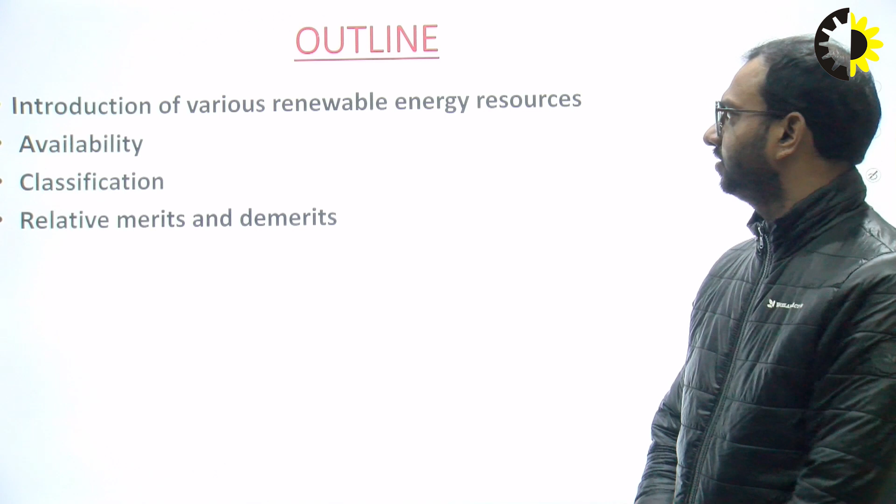Today, I will discuss one of the complex topics of the subject renewable energy resources. So today in this lecture, I will discuss about various renewable energy resources. These are the content of my today's lecture: introduction of various renewable energy resources, its availability, classification, and its relative merits and demerits.

So what is energy resources? Basically, energy resources are classified into two categories: one is conventional energy resources and another one is non-conventional energy resources. Conventional energy resources are also known as non-renewable energy resources, whereas non-conventional energy resources are also known as renewable energy resources.

First of all, I will discuss what is conventional, non-renewable energy resources. Basically, these are accumulated in nature over a long span of time and cannot be quickly replenished when exhausted. These are known as conventional energy resources. If we are talking about its examples, coal, petroleum, natural gas, and nuclear fuels like uranium and thorium come under the category of conventional energy resources.

Then what is renewable or non-conventional energy resources? Basically, these sources of energy can be used again and again, and this can be generated continuously in nature. Examples of renewable energy resources are solar energy, solar thermal power plant, wind energy, biomass energy, ocean energy, thermal energy, geothermal energy. These are the examples of non-conventional energy resources.

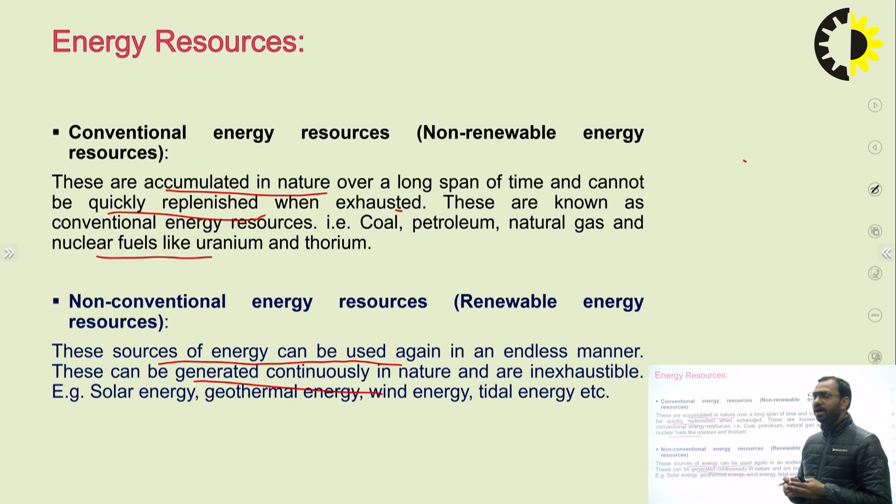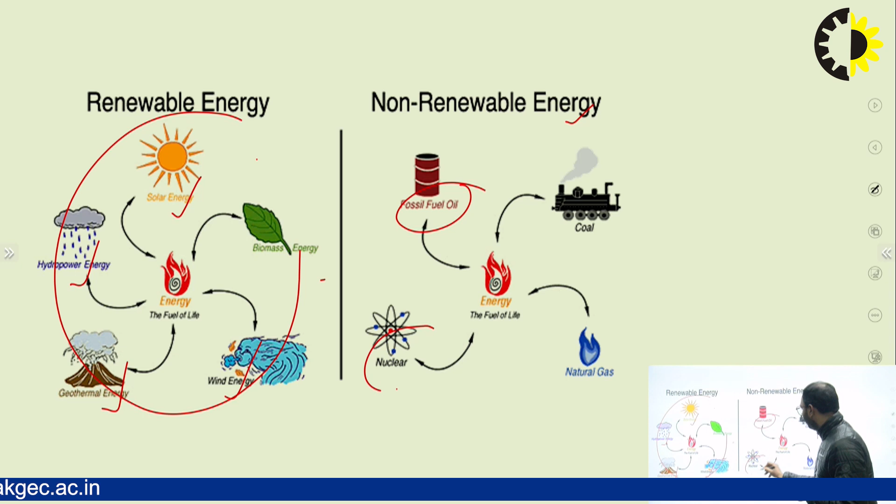So these are the renewable energy resources: solar energy, hydropower energy, geothermal energy, biomass energy, wind energy. All these are examples of renewable energy resources. Then, if you are talking about non-renewable energy resources, fossil fuel, nuclear fuel, natural gas, and coal are examples of non-renewable, conventional energy resources.

Now I will discuss one by one in detail what is wind energy resources, what is solar energy, what is ocean energy. So what is wind energy? Basically, wind power is usually generated by wind turbines situated either onshore or offshore.

If we're talking about wind energy in India, wind energy is utilized by means of windmill. Many projects on the windmill system for water pumping and production of small amounts of electrical power have been taken up in our country. Following are some of the developments in India.

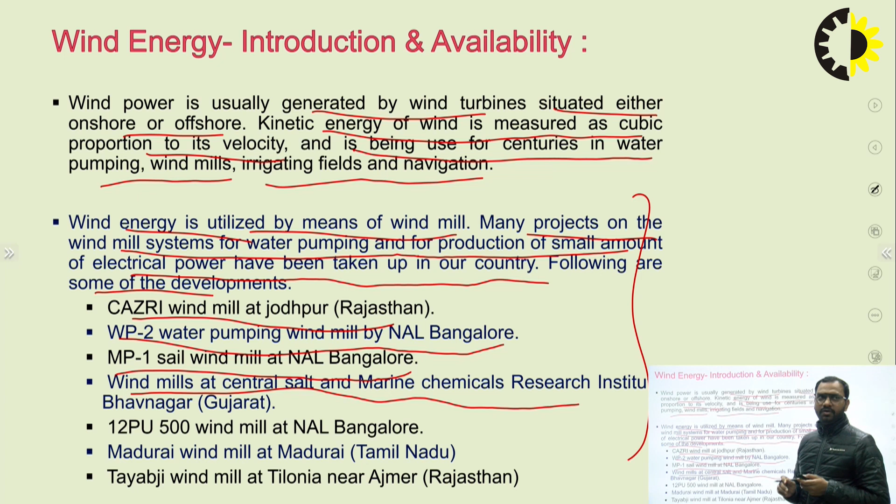Number one is CAZRI windmill at Jodhpur, Rajasthan. WP2 water pumping windmill by NAL Bangalore. MP1 Sail windmill at NAL Bangalore, windmills at Central Salt and Marine Chemical Research Institute, Bhavnagar, 12 PU 500 windmill at NAL Bangalore, and Madurai windmill at Madurai, Tamil Nadu, and Tayabji windmill at Tilonia near Ajmer, Rajasthan. These are some developments regarding wind energy in India.

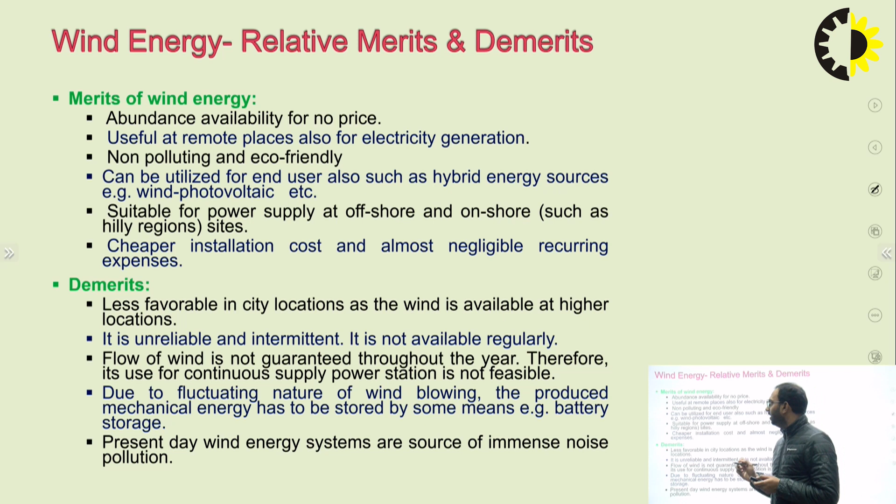Now, what are the merits and demerits of wind energy? If you are talking about its merits: abundance availability for no price, useful at remote places also for electricity generation, non-polluting and eco-friendly, can be utilized for end user also such as hybrid energy sources, example wind photovoltaic etc. Suitable for power supply at offshore and onshore, and cheaper installation cost with almost negligible recurring expenses. These are the merits of wind energy.

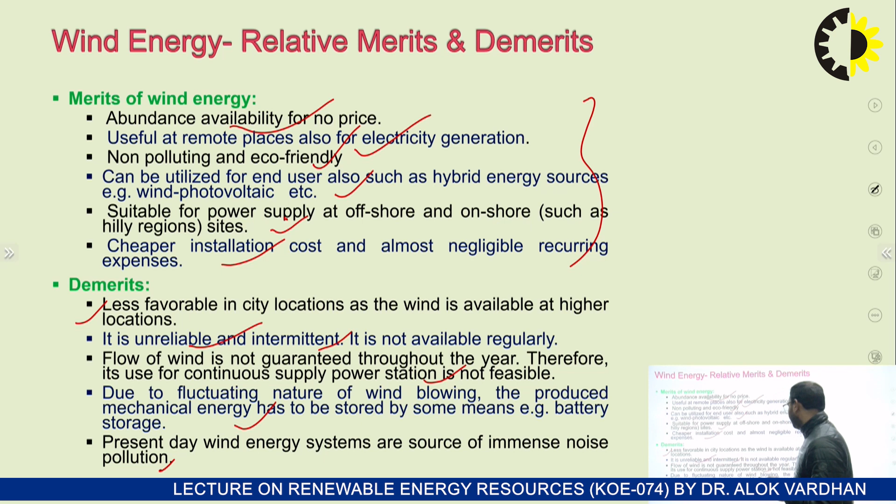Then what are the demerits? The first demerit is less favorable in city location, as the wind is available at higher locations. Then it's unreliable and intermittent, not available regularly. Flow of wind is not guaranteed through the year, therefore its use for continuous power supply stations is not feasible. Then, due to the fluctuating nature of wind blowing, the produced mechanical energy has to be stored by some means, example battery storage. And the last disadvantage is present day wind energy systems are a source of immense noise pollution.

Then the second renewable energy resource is solar energy. What is solar energy? Solar energy means it is clean and abundantly available renewable energy. The total radiant energy of the sun is vast, out of which only a small fraction gets incident on the outside of the earth's atmosphere.

30% of it is directly reflected back to the outer space in short wave radiation. 47% is directly converted to heat that is lost to outer space in long wave radiation, and the major portion of the rest, 23%, causes evaporation, precipitation, and circulation of water in the hydrologic cycle of the earth. So the sun radiates its energy in all directions of the universe.

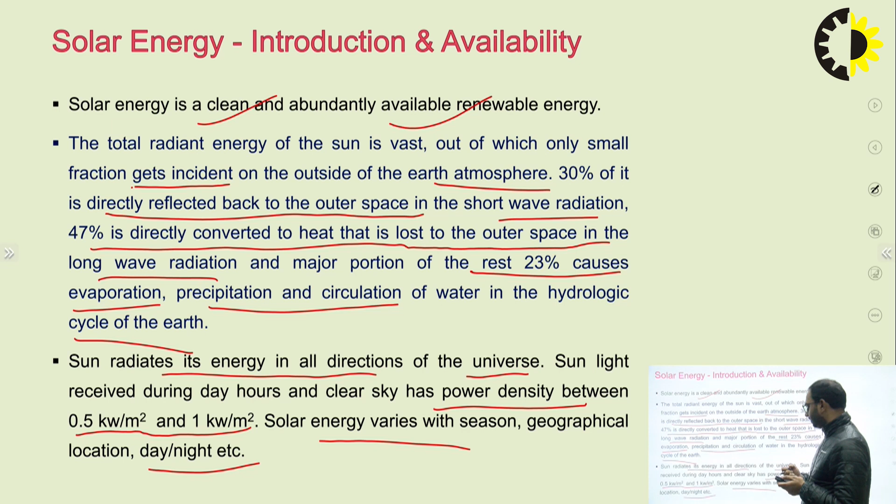What are the merits and demerits of solar energy? The first merit is noiseless operation, occupies less space on floor as there is no need of storage vessels, cheaper initial cost, and no need of containers to store fuels. In most equipment, maintenance cost is negligible and does not require any serious attention during working. For example, food will be cooked simply by putting a solar cooker in sunlight. So these are some advantages of solar energy.

Then what are the disadvantages or demerits? The first demerit is solar equipment fails to work at night, on a cloudy day, or in rainy season. Larger space is required for collection of solar energy at a useful rate, and it also depends upon time, season, and condition of the environment.

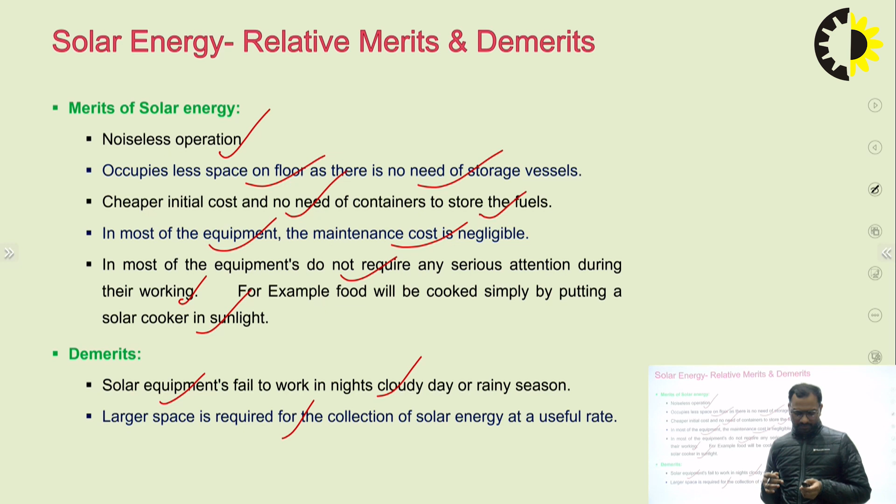The next renewable energy is tidal energy. Tidal power exploits the movement of water caused by tidal currents, the rise and fall in sea level due to the tides. Although not widely used, it has potential for future electricity generation and is more predictable than wind and solar power. The technology required to harness tidal energy is well established, however it remains expensive and there are relatively few applications, around 40 worldwide.

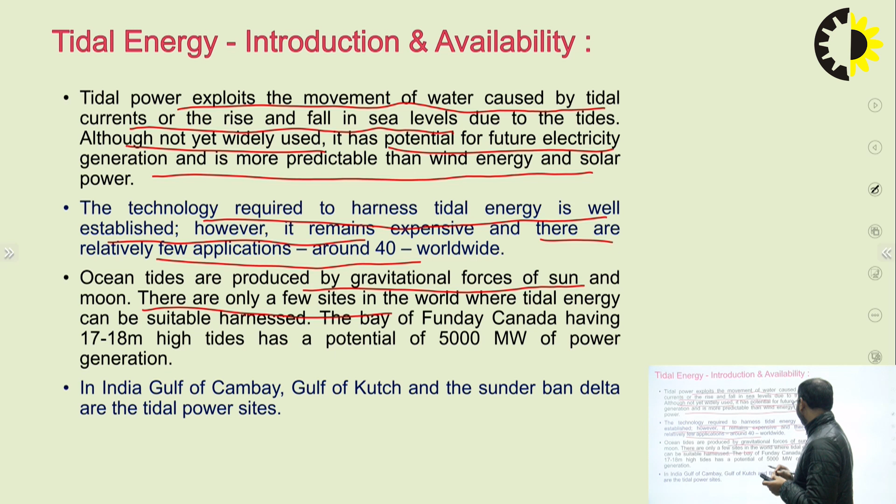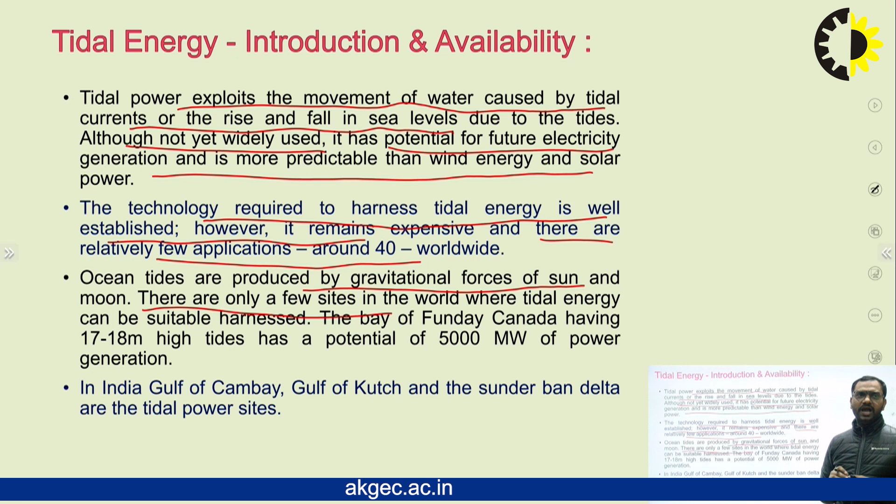Ocean tides are produced by the gravitational force of the sun and moon. There are only a few sites in the world where tidal energy can be suitably harnessed. The Bay of Fundy, Canada, having 17 to 18 meter high tides, has a potential of 5000 megawatts of power generation. In India, Gulf of Cambay, Gulf of Kutch, and the Sundarban Delta are the tidal power sites. This is the pictorial representation of a tidal power plant.

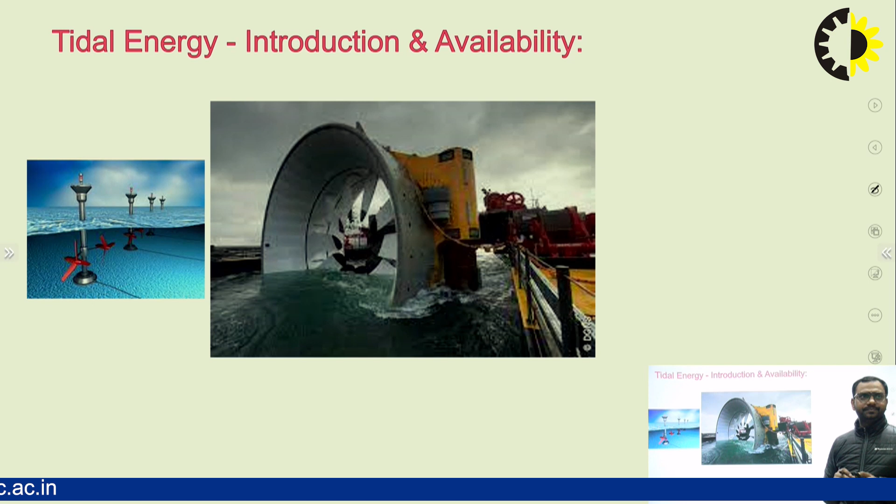What are the merits and demerits of tidal energy? The first merit is very less area is required because they are on bays. It is free from pollution as it does not use any fuel. It is much superior to hydropower plants as it does not totally depend on rain, which always fluctuates year to year. It does not produce any unhealthy waste like gases, ash, refuse, etc. Tidal power has a unique capacity to meet peak power demand effectively when it works in combination with thermal and hydro systems.

Talking about demerits, a tidal power plant can be developed only if natural sites are available. As these sites are on the bay, which will be always far away from the load center, the power generated involves more transmission cost. Supply of power depends upon the timing of tides, hence not continuous. To solve this problem, a double basin with pump storage must be made. The capital cost of the plant is also high, and navigation is obstructed.

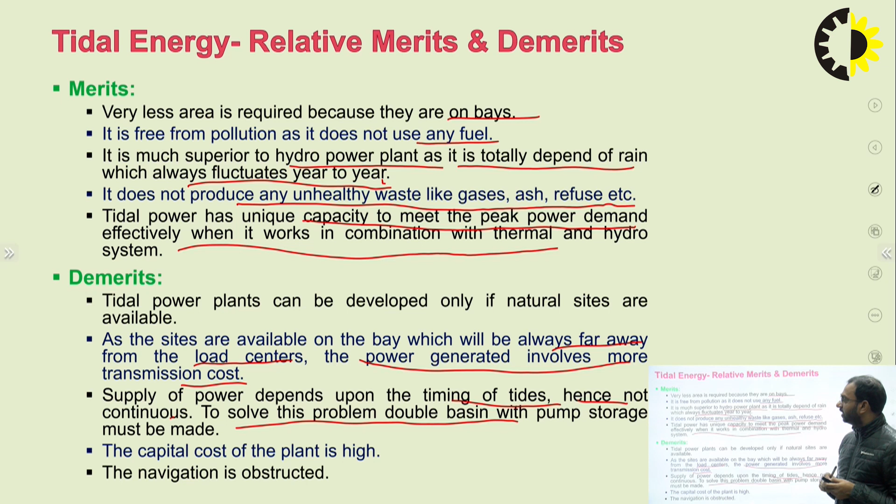What is MHD energy? MHD energy is also a type of renewable energy source. MHD generation, also known as magneto-hydrodynamic power generation, is a direct energy conversion system which converts heat energy directly into electrical energy without any intermediate mechanical energy conversion. This is the pictorial representation of an MHD power plant.

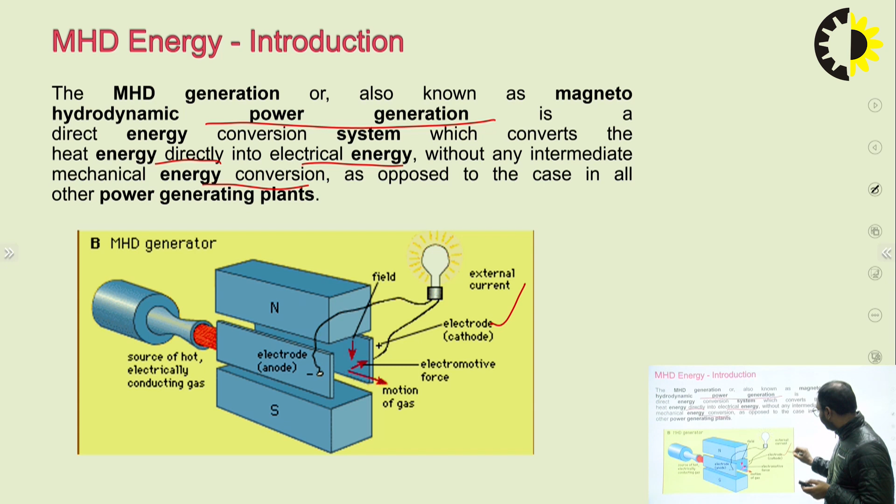What are the merits and demerits of an MHD power plant? The first merit is it is more reliable because there are no moving parts. The efficiency of an MHD system can be about 50%, compared to less than 40% for the most efficient steam plant. As soon as it is started, it can reach full power level. Power produced is free of pollution, has less overall operating cost, and the capital cost of an MHD plant is comparable to that of a conventional steam plant.

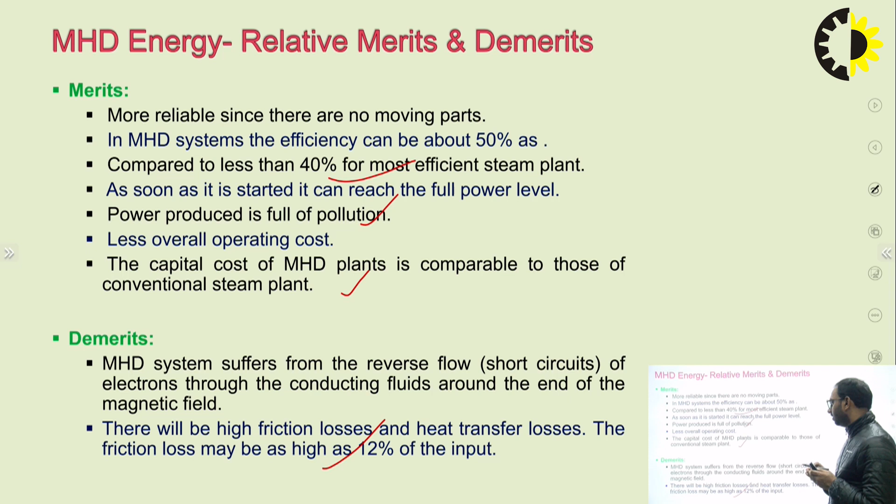What are its demerits? The MHD system suffers from the reverse flow of electrons through the conducting fluids around the end of the magnetic field, and there will be high friction losses and heat transfer losses. The friction loss may be as high as 12% of the input.

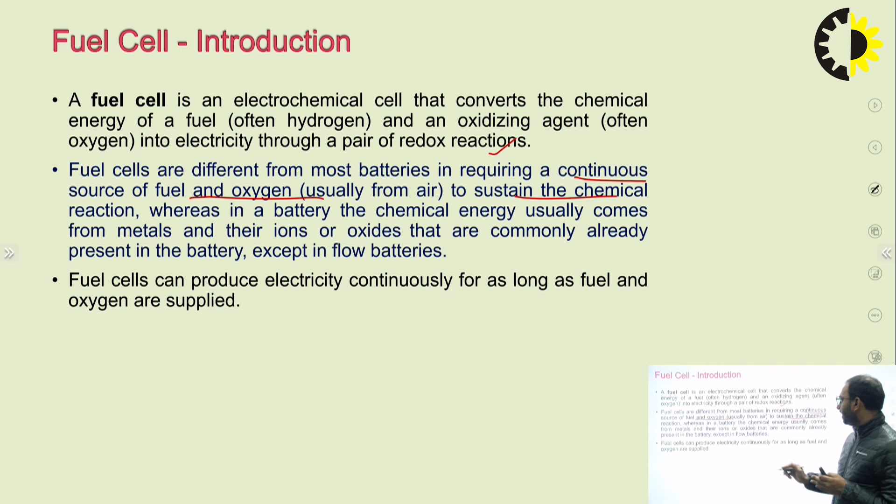What are the merits and demerits of fuel cells? The first merit is it has very high efficiency, as high as 70%. Fuel cells have fewer mechanical components, so maintenance is also less. Fuel cells take little time to start operation. Space required for a fuel cell power plant is less. Large amounts of cooling water are not required like in a conventional steam power plant. Fuel cells can be installed near the point of use and do not make noise, hence they can be used in residential areas also.

What are its demerits? Low service life and high initial cost. The use of fuel cell power is still unsafe due to the explosive nature of hydrogen and oxygen. There is availability concern of suitable catalyst to function efficiently, and refilling of auto vehicles is quite difficult. So these are the advantages and disadvantages of fuel cells. Thank you for watching.